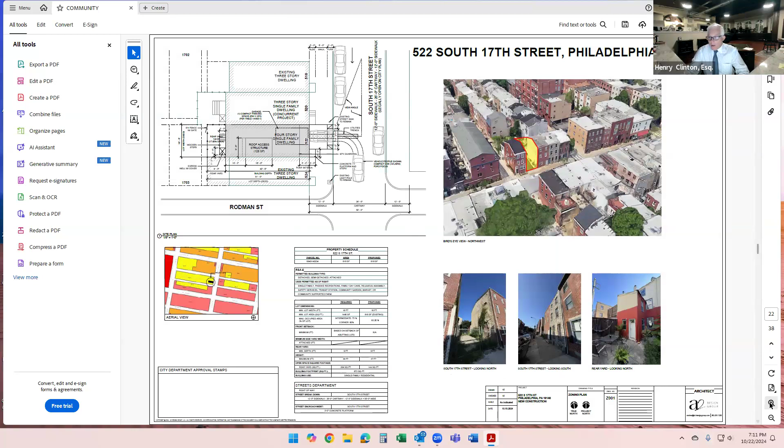As I said before, one of our refusals has to do with occupied area. What I said at the outset is the depth of our building was matched up evenly with 518, who actually has signed a petition of support, which I'll present at the end of the project. We have turning radius that's ample for getting a car in and out, and as you could see from the photographs I showed, there's actually 2 cars parked in the vacant lot now.

I'll walk through the floor plans. There will not be any basement. This will be a slab on grade, 1 car parking, entrance hallway leading to the mechanical space, which will be at the back end of the garage, accessible either from the hallway or from the garage. Then you have a half bathroom and a full bathroom, and then a bedroom in the rear.

You would then proceed up switchback steps to get to the living area on the 2nd floor in the front, kitchen area, back patio area in the yard.

And then you would continue on the straight leg steps up to the 3rd floor, where we have 1 bedroom. The 2 bedrooms are on the 4th floor, 1 bedroom on the 3rd floor, with a large walk-in closet and bathroom. I would consider this the primary bedroom.

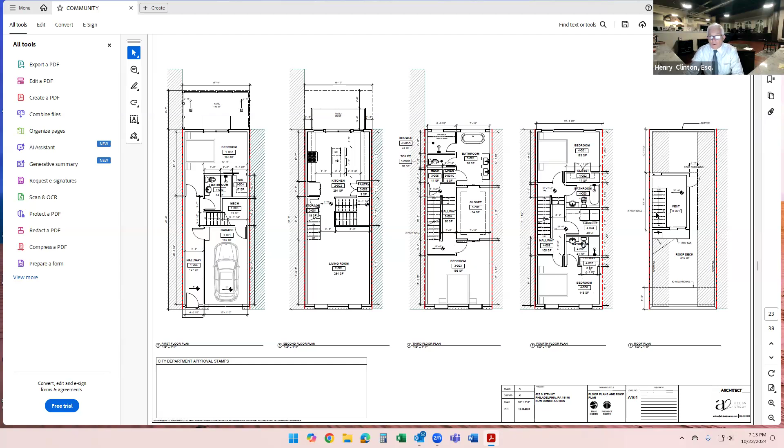Then you would again continue up the stairs to get to the 4th floor, where you would have 2 bedrooms, 2 baths, and then an area to walk up to the rooftop deck, which is accessible from the hallway. We don't have to go through any bedrooms.

These are the front elevations. We have a wood garage with some lights to bring light into the garage, mimicking the front door. 2nd floor, 3rd floor, and 4th floor have casement windows, which will open all the way. The rooftop deck is set back the required space of 5 feet. There is a pilot house to access the rooftop deck.

When we designed the project, it was difficult to line up evenly with the properties on either side, because they're both at different elevations and because we have a garage. But we are keeping the red brick look with some solid lintels across the top and the bottom on all floors.

And then the rear of the property, I have siding, metal siding on the rear, sliding glass door to access that patio, a small walkout porch or deck on the second floor, and then double hung windows on the fourth floor and casement windows on the third floor.

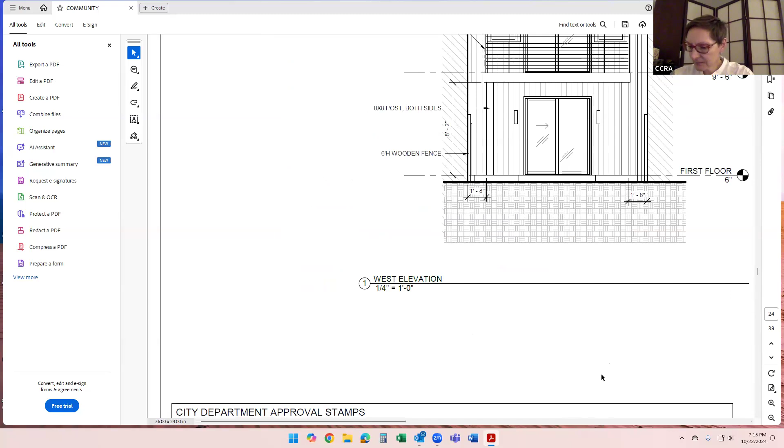I think you're still muted.

Does your owner own 520 South 17th? Yes, he owns both properties. Okay, because the rendering shows he owns the property you're aligning to. Are you renovating that building? That building, I believe, is going to be torn down, and the elevations matched to 522. So the building you're aligning to, you're going to tear it down. Correct. So the alignment's going to a building that's going to not exist.

Okay, that's clear. Sorry, can I jump in here a little bit? My name is Andres, I'm the design professional.

So just trying to explain, the building we talk about is the one in yellow, correct? Correct, so that's the project, but the one that's going to be torn down is the one on the right-hand side. Okay, and which building are you aligning to? So we're talking about a different project here, it's going to be the one we're talking about right now, the one in yellow, right? So there's going to be a new building also built on the right-hand side of that. Correct, I had the cursor on the wrong side. Correct, my mistake, sorry Sam.

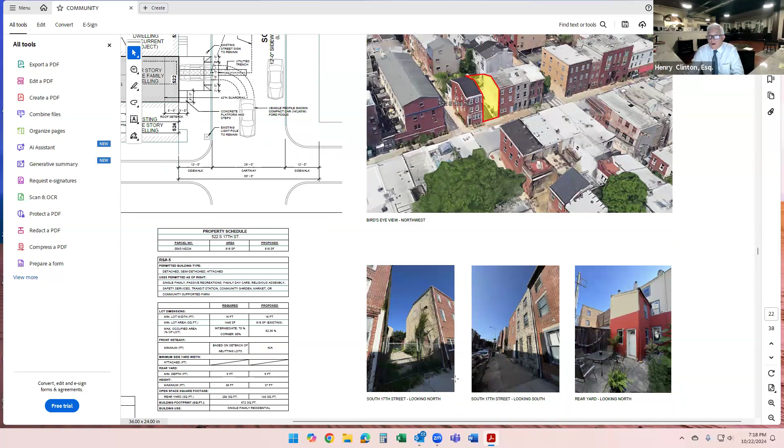But I have two issues. One, I've walked the street, I live in the neighborhood, and I see no garages on either side of the street in our district. So if I'm going to vote personally for a variance, I want to see something in the neighborhood that looks like what you're proposing. I see nothing. Nowhere is there a garage on the adjacent blocks in CCRA's district. Do you have a reason why we should allow a garage on this one property? Well Sam, as I indicated in the photographs, this has been used for parking for decades. There's a curb cut there, and it's just continued use of the curb cut that's in existence.

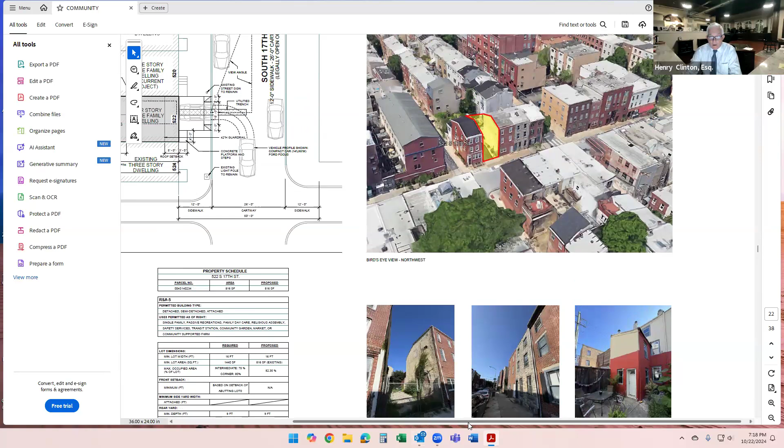Okay, but there's no garage parking on the street, you agree? I didn't see any, no, but there is parking on this particular lot. Right, I agree, on the vacant lot there's no garages. Okay, second thing, you're asking for a larger built area than allowed under the zoning code. Tell me again why we should allow that? Because we were matching up with the depth of the house next door. That's being torn down, going to be torn down, correct? Okay, I'm done. Great, thank you.

Just going down the list, Karen Moskowitz. No questions. All right, thank you. Ben Weinraub.

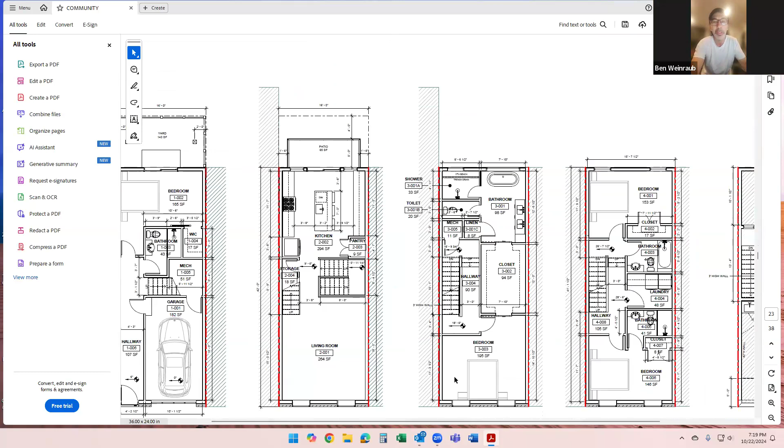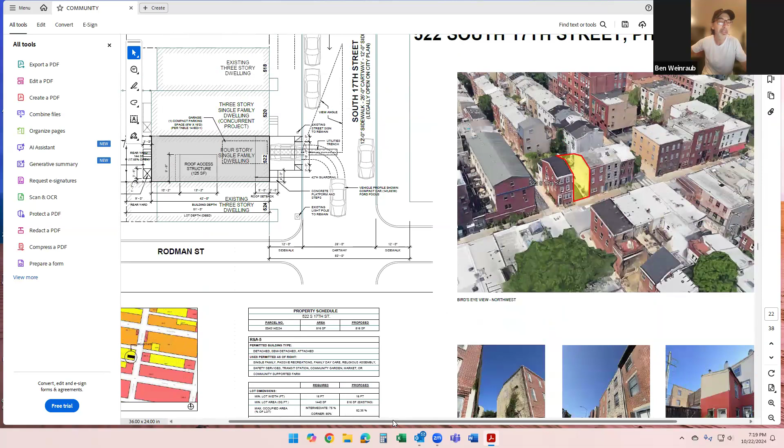Just one quick question, good presentation. The zoning plan shows wooden steps in the back, the other plans don't, I assume that's been deleted. Can you ask that again? Yes, the zoning plans show wooden steps in the rear of the property, and the other plans don't, I assume that was deleted. So it's technically supposed to be just like a wooden platform, right? Because there's going to be like a 6 or 7 inch drop from that sliding door at the back. Correct, so no steps going up to the second floor is my point. Right, correct. Thank you.

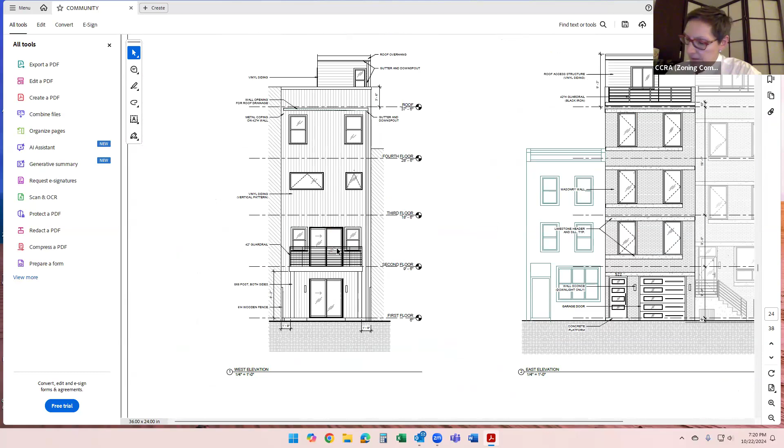Okay, great, Bob Lane. Actually, a lot of my questions were addressed, but what's been your communications with the neighbors? Have you had opposition? Robin maybe can answer that.

I've only attached some signatures from the block. Robin, what you've attached are the people in favor, right? Correct. Yeah, so who have you heard that from? That is not people in favor, Bob, that we could get a hold of. No, but I'm asking, have you heard from anybody who's not in favor? Robin, can you address that? No, we didn't run into anybody that was not in favor. And then we've also sent out the neighborhood acknowledgement forms, for the direct neighbors. So the one for 518 South 22nd, I believe, also has initialed and signed off. So from both, we haven't had any opposition as of yet. Okay, thank you.

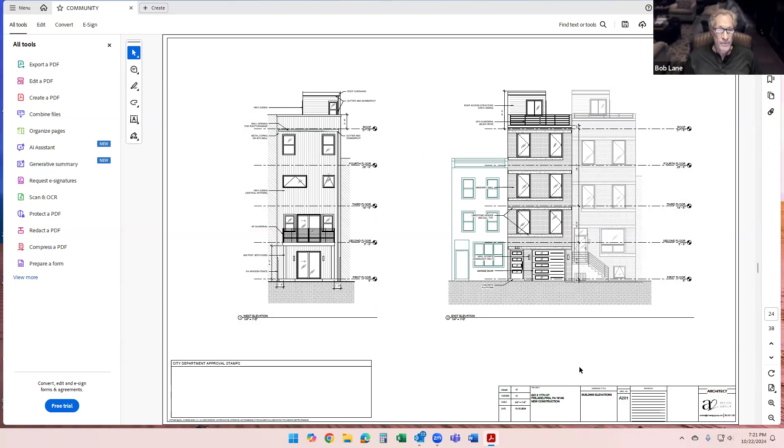Evan Litvin, any questions? No questions, thank you. Doug Mellor?

Yeah, I do have a question. If I had those two properties, I'd be tempted to join them. Is that something you thought of?

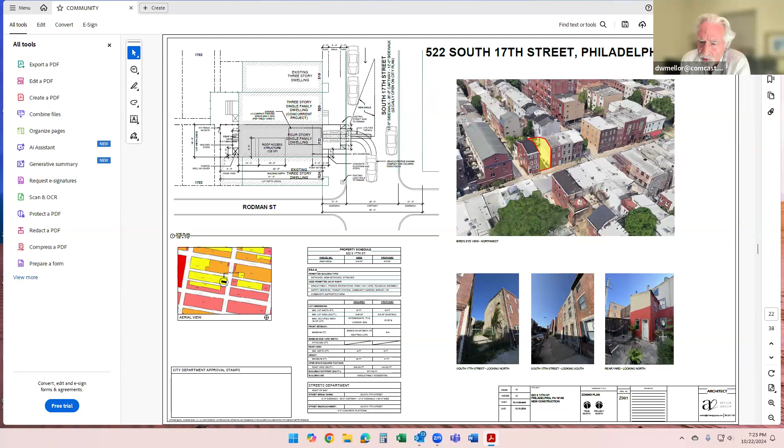And what are these solid lintels that I saw on the plan? So typically we'll try to do some limestone lintels to fit in with the fabric of the neighborhood. We plan to do red bricks, limestone lintels across, just to add some detail and texture. 520 and 522 will have matching facades.

So we did try to line up the heights, again with the neighboring home that will be built by right at 520. When I say we're going to line up the cornice lines and the depth, we're just going to match it to 520, which is a by right project, single family, no parking, that will replace the current home that is beyond repair. Thank you. No problem, okay, thank you.

Ben Zuckerman, any questions? Yeah, I just want to see if I get this straight. The reason why you're asking for more than the required allowable lot coverage is to line up, as I understand it, the front of this with 520 and the rear of it with 520.

Am I correct? Yes. But 520 will not be existing after you demolish it, correct? We are going to line it up with the new construction home that is going in its place, fully by right. It sits on a slightly larger lot, so we're allowed to pull it back a little further.

If you look at Atlas, 520 is on a 60-foot lot, so by right we can pull the project a little further back. So we'd like them to conform on the front and the rear. I think it would make more sense.

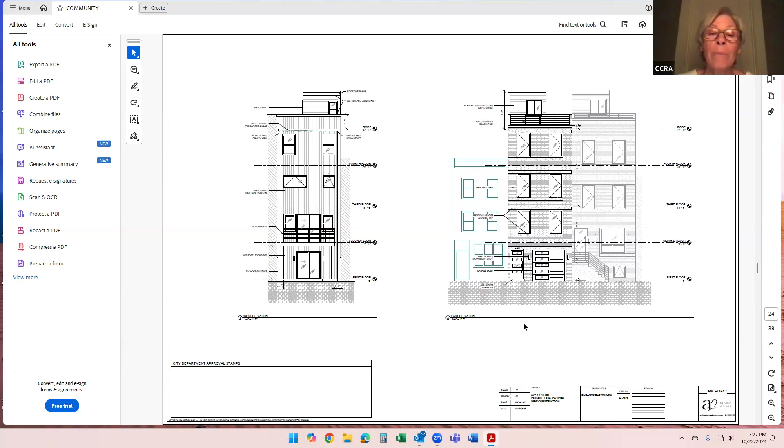I think given that you are asking for an environmental hit by creating more impermeable space by extending the building, that's a second bigger hit by making it impossible to plant a street tree. So our neighborhood is undertreed. A goal for the city is 30% tree canopy, and our neighborhood is less than 12 and dropping, in large part because we lose our mature trees and because of developers who aren't sensitive to the need of trees for the neighborhood. So anyway, that's my objection to the garage.

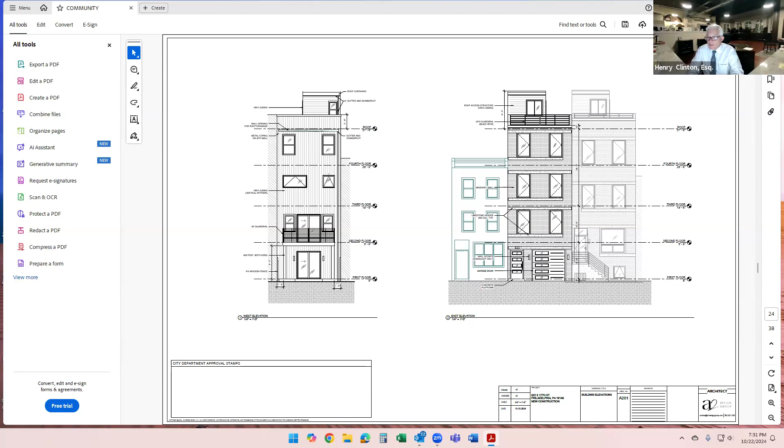I just want to say thank you so much. I think everyone has made their points and I appreciate them. I want to hear from other community members as well. A back and forth might not be the best option. We have heard clearly that there's a concern about trees, and that there can't be trees within 10 feet of the garage. We've also heard questions about the rise and run on the stairs to the pilot house and the lighting—will there be downward lighting, and will there be negative impacts of the lighting on the pilot house? I now want to open it up to other community members.

Are there any near neighbors who have comments on this property, 522 South 17th Street? I invite you to raise your hand using the raise hand feature at the bottom of your screen. All right, going once, going twice. Are there any community members who would like to simply unmute themselves and voice their opinion on the project? Okay, seeing none.

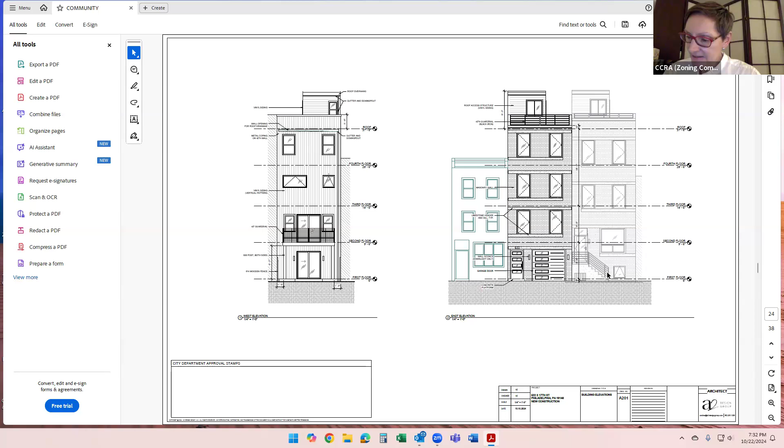Well, I see none, so I'm going to thank everyone for their clear presentations on this project, and thank you very much, Mr. Clinton, for your clear presentation and for everyone else related to the project. We're now going to go to the second project on our list, the second property we're going to hear tonight, which is 415 South Van Pelt Street.

This is an application to legalize the extension of a masonry fence to a height of 10 feet, 7 inches. The reason for refusal is that any fence located nearer to the front lot line than the required building setback, or the actual distance of the building from the lot line, whichever is greater, shall be no more than 4 feet in height and no more than 50% opaque, whereas the proposed fence is 10 feet 7 inches high, and more than 50% opaque.

And so now I'm going to invite the representative for this property to present. I think Jennifer Bazydlo is on the call. Yes, and very good job with my last name—it's Bazydlo, but that was very close. So I appreciate that. May I share my screen?

Please do. Okay, let me just get to the right... give me 1 second, I have to hold on. I had something else open and it doesn't want to bring up my presentation, 1 second, I'm so sorry. In the meantime, what I'll do is outline our agenda—we anticipate 10 minutes for the presentation, and then our goal is 15 minutes for all questions. Sure, let me just close out of this and I should be ready to go. I apologize for that, there it is. Sorry, I had another PDF open and it wasn't letting me get to this PDF.

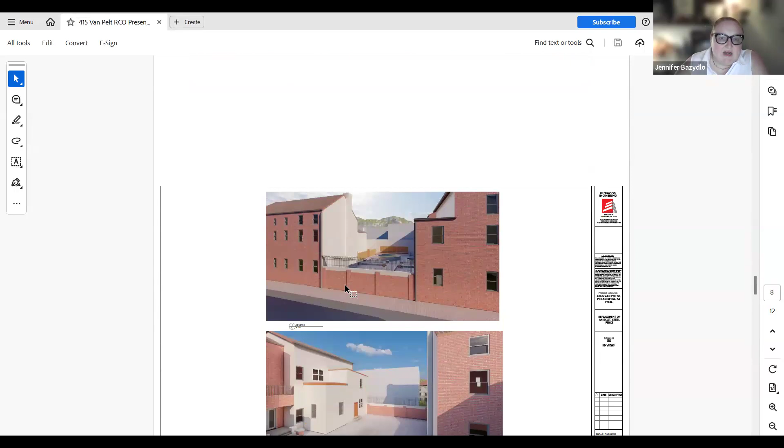Through that, the thing that came up the most was to make it look more like what it had been—brick with metal over it, but perhaps with some added security. In this one, there are big gaps between the bars and the brick wall where people were using it to leverage themselves up. And the tines at the top of the fence were going in either direction, not just one—one went into the property, one went out—which was also allowing it to be jumped a little more easily. And this fence was also only, let me get to my data here...

I believe that this one was, I'm sorry, in like the 9-foot range.

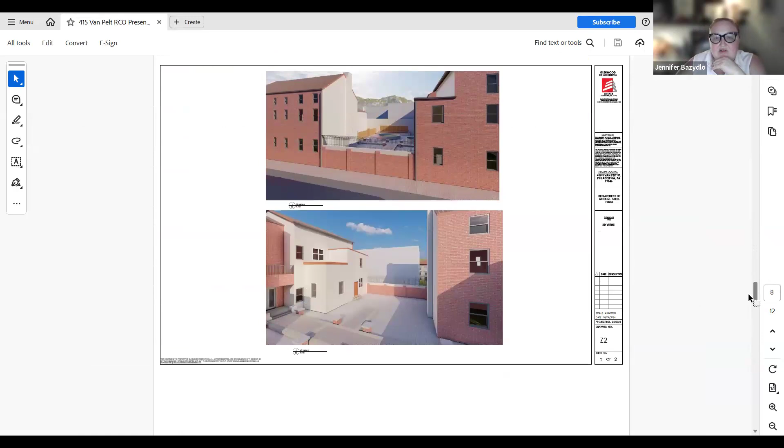So our proposal, after reviewing with the neighbors and with the property owners to try to find a compromise, is this revised plan right here. There would be 2 layers of brick with stucco covering them on the parts where the original brick would be kept, and then 1 layer of concrete block with stucco covering on the parts that are the pillars.

And 2 layers in the divots, where it goes lower - that's an additional 1 foot 4 inches of stuccoed block. It's 10 inches on the top where the pillars are, and above that would be a 4-foot metal railing, all facing out, for a total height now of 12 feet.

The original black metal were 3 feet 10 inches. These are 4 feet, and then they have the additional height on the brick or concrete block. What this provides is the additional security of having a pretty solid wall above the height where someone might be able to reach under and prop themselves up. But then we have openness and more of that original feel with the metal above it, and additional security of pointing the tines out.

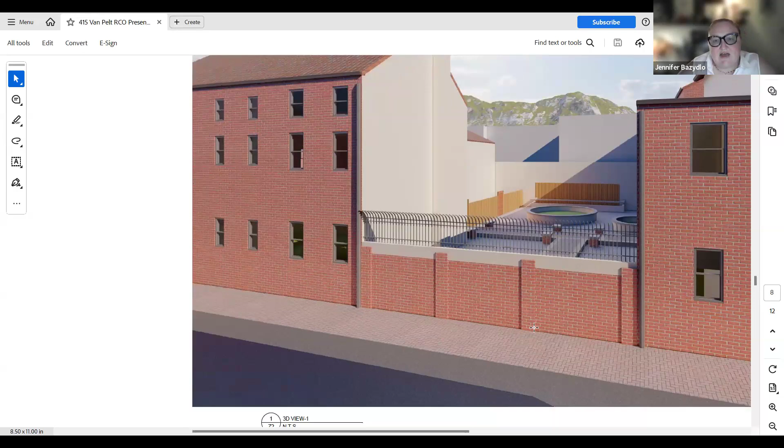So it's harder to jump the fence. I think what people really objected to is feeling encased by this wall without being able to see anything above. So the compromise here is that you'll have just a little bit of that stucco, and then railings above, which I think meets the needs of the community and the residents of the building. So that's where we came up with this.

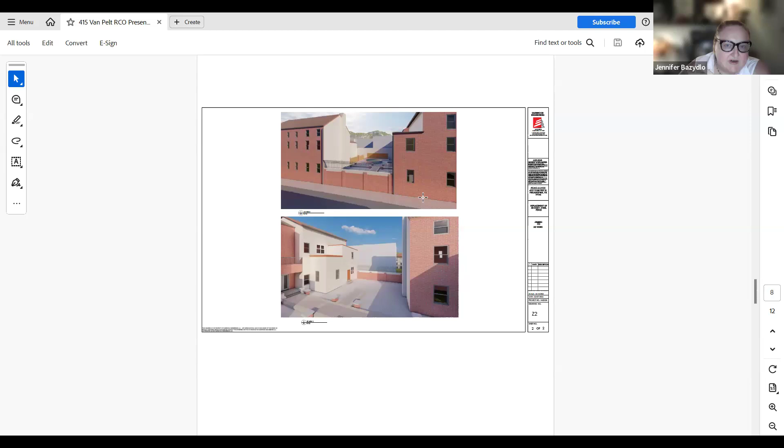I just wanted to point out that because of the location, had these 2 buildings just been connected, there could be a 38-foot brick wall here. The only reason for the refusal of the height and opaqueness is because these 2 buildings aren't connected. It's a weird setup because you have all these different buildings on one parcel, creating unique zoning and architectural needs to fill in at street level where a building normally would be, with something that protects the inner courtyard of this complex.

So, in the interest of brevity, I think it's pretty straightforward, not super complex. I know people will have questions, but I don't think me talking more without hearing the questions is going to help. All right, well, thank you for that. So now I'll open it up to committee questions.

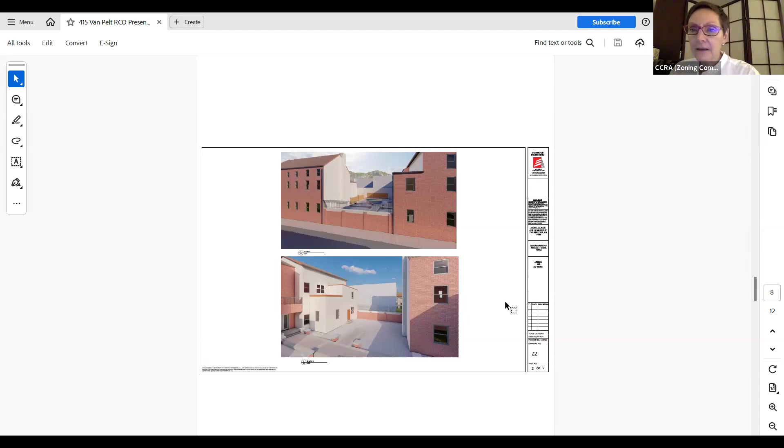I'll start again - Sam Gordon, any questions? And Sam, you're muted again. There we go. Is there a reason that you need that stucco portion?

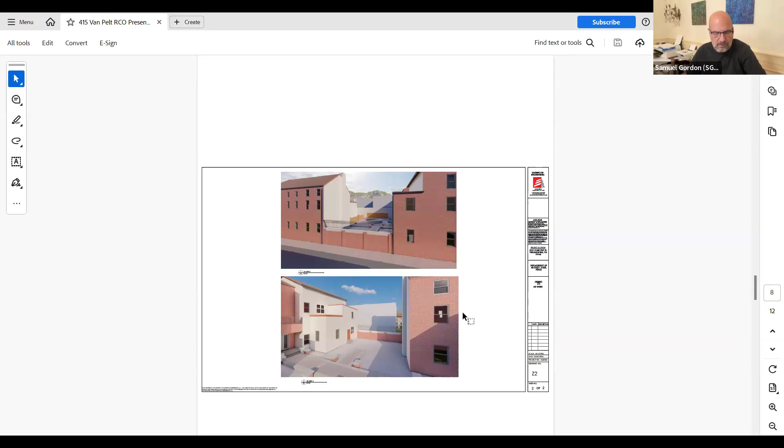Sure, so it will be matched to the sides of the building. The reason it's necessary to have something solid there is because people were using it - we have it on video - to reach over that existing brick wall and use the space between the metal and the brick to propel themselves over. So we needed the solid part to be a little higher to prevent people from leveraging themselves up over the fence. The whole reason this original fence was changed was because people were regularly hopping over and breaking into apartments, stealing things.

Right, but you're only proposing a 10-inch CMU, which is- sorry to interrupt, can I just chime in, Sam? Yeah, Sam.

This was recommended by the contractor who's going to build the fence. He said he needs a base to anchor the bolts into, and that the brick itself isn't the strongest - he wanted us to do a poured concrete. So I said, what if we just cut the wall and leave the CMU that's filled with concrete - could that serve as the base? And he said that'd be fine. So it does have structural integrity for the metal fence. I'll leave it to other members of the committee.

Sam, we could also discuss covering that particular portion, maybe some sort of cladding, if that's really the issue, but it does need to be a solid portion at the bottom of that metal grating. I'm open to painting it black, red, or the same color as the stucco if that'll look more appealing, but we need some sort of base for them to anchor the fence into.

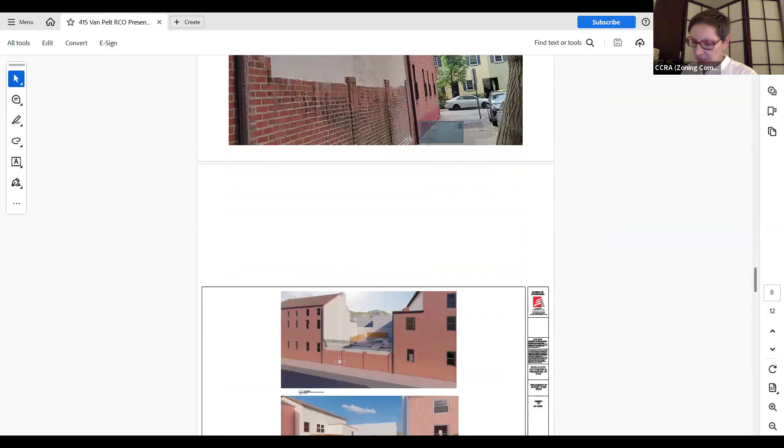Those are helpful clarifications. Karen Moskovitz, any questions? What has the reaction of the neighbors been with this?

I had been in communication with Charles Goodwin, who I believe is on the call, so I won't speak for him. I know he had expressed that he wanted the metal grates. I had sent him these plans but hadn't heard back from him yet.

Charles, I'll leave it up to you to talk about the neighbors' reaction, since I know you were talking to the other neighbors as well. We will get to the neighbors, including Charles Goodwin and everyone else. Karen Moskovitz, any other questions?

No, that's all. Ben Weinrob? No question. Bob Lane? Yeah, I have a couple.

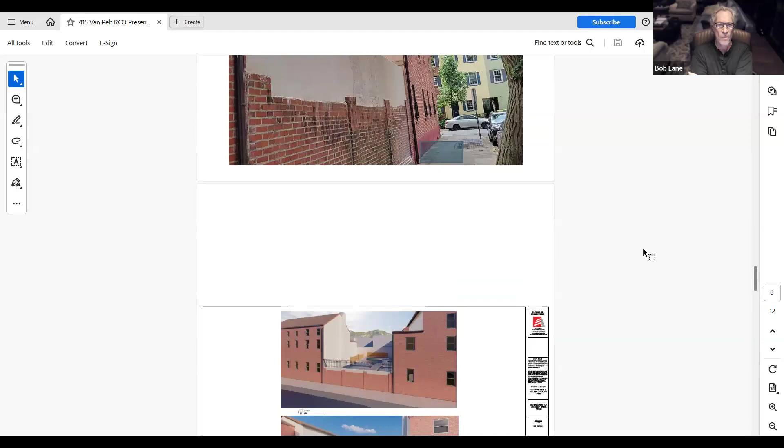I totally understand the desire, I have it too, for security living in the city. What is unique about this property? Are you more dangerous or more vulnerable because you have a fence there than all the other properties in Center City that have walls and fences that comply with zoning? What's unique about this property?

I think the unique thing about this property is, if we can go to the overhead look here, hold on, let me zoom in a little bit. This is all one property, consisting of 6 different buildings. There would normally be, if this was the typical street, a building here that would be 38 feet tall.

Sure, I would say the difference here is that it's more attractive to crime because it's not a single person's property, it's 45 people's property. I would also say there was an existing wall, a grandfathered-in wall that was 10 feet tall, and people were still hopping it. So clearly there's an issue with this particular location, because we already had a wall and fencing much higher than allowed by right, and we were still having people hopping it.

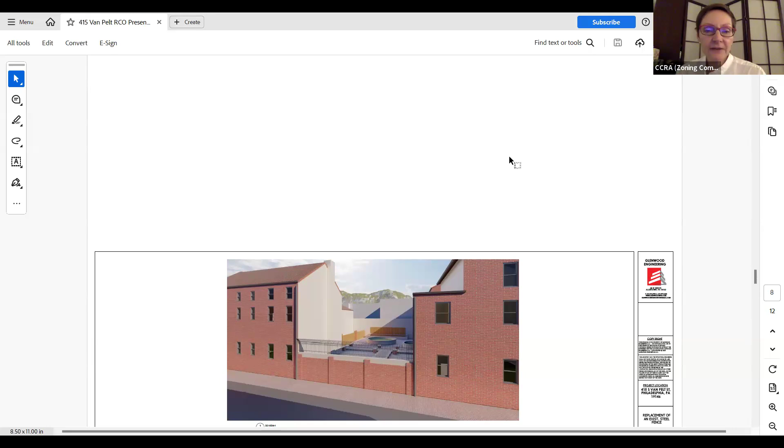Well, if there's a spokesperson for the neighbors, we'd like them to go first. Yeah, I hate to self-appoint myself, and all I've been doing is running emails. I would say the only reaction I've had from any neighbor to the proposal, I mean everyone, to sort of put some more perspective on this.

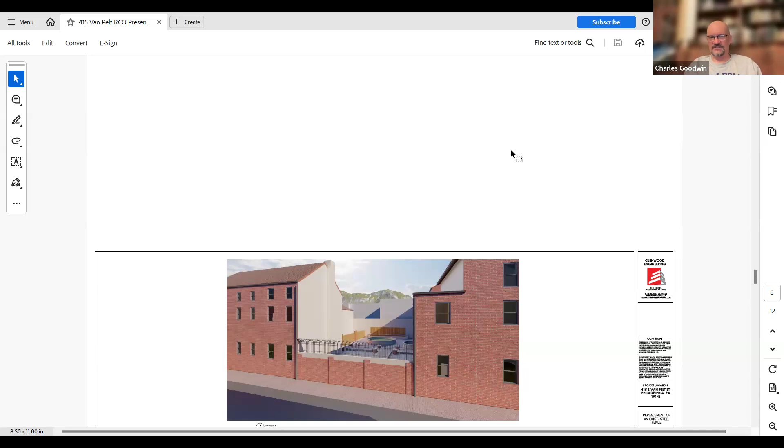This is actually a nice, lovely little courtyard with, unfortunately, the rendering doesn't have the trees in it, which when the metal fence was there, you could walk down the sidewalk and look into the courtyard and you'd see all these lovely large trees, as you could see in the satellite photograph, which is really quite contributing to the block. I think everyone was content with the prior arrangement, which was a masonry or a brick fence overtopped with a metal fence.

And again, no one has had any complaints save one thing about the proposed replacement. Everyone seems to be favorable to it, except for that little gray stripe in the middle where the metal fence is being anchored, and some people, one or two people, have expressed dissatisfaction with the appearance of that.

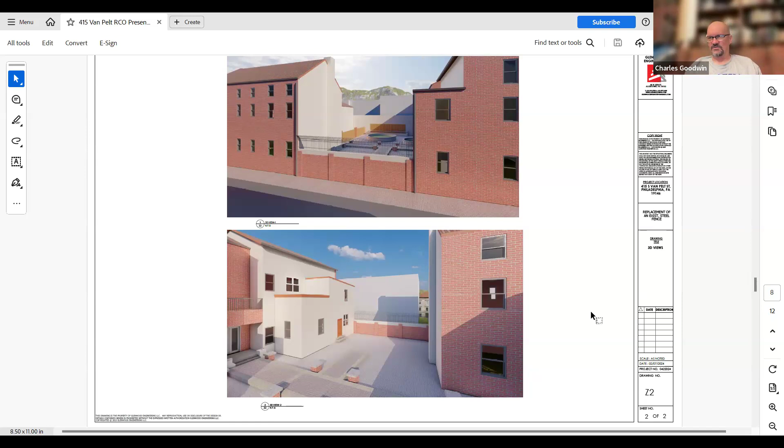I don't know if it would be feasible to perhaps put something like tiles or a decorative element over the top of, or on the facade of that concrete to make it more attractive. I suppose you could try some masonry veneer, but I think that would probably clash horribly with the existing brick. Speaking solely for myself and my own design sense, otherwise, no one has really, we were fine with the way it was before. So this is not materially different from the way it was before, except making it a tad more secure.

All right, well, thank you for that. I would just like to say that the original proposal was not to leave it gray, or what we're thinking isn't in the rendering gray, but the initial thought was to match it to the stucco, like this kind of red stucco that mimics the brick, so it wouldn't stand out quite as much. Well, but I was thinking like some terracotta tiles or something that you stick on the front there. All right, understood, you would like some sort of element other than just the stucco. Right, or some various Turkish tiles, something that's functional but decorated. Understood. Okay, well, thank you all for that.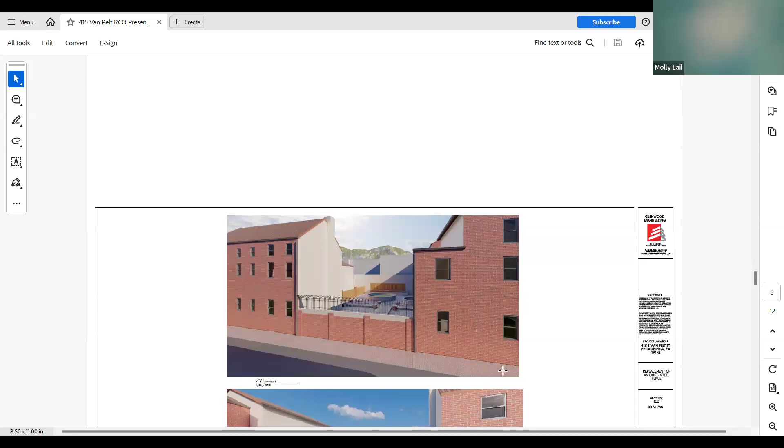Thanks, I live on Van Pelt Street, Molly Lail, and I think I speak for most of the neighbors. We were kind of horrified with the install because it was so bad. There's a middle section that looks unrelated to the sides. I'm just wondering, I've got to wonder how the fence was affixed before without the concrete and stucco.

Thank you for that question. In terms of this updated proposal, can you share your questions or your views on it?

I agree with Charles. It seems okay if you're going to make the concrete block a little less obvious.

I'd also want to say one more thing. A lot of the problems with the thefts was the front door not locking. There was an anteroom that was constant, anyone could go in there, I could go in there at any time. And I think a lot of the thefts were due to that, not necessarily if you have a video of someone going over the wall.

But I must say the front door did not work for a long time. The front door has been addressed and there was still a lot of thefts going on afterwards. That's when the idea about the fence came up.

Are there any other community members who would like to ask a question or state a position on this project? I invite you to unmute yourself and share your point of view. I have one more, go ahead.

So the owner seems amenable to suggestions, and in similar situations, I'm an architect, I think a limestone cap would be both attractive. It could be real limestone or cast limestone. It would put a waterproof cap on top of your wall, which would be functional, decorative, and allow the person to anchor the railing to. Would you be amenable to that rather than that stucco wall?

Yeah, if you want to send some options, I want to do something relatively cost effective and not spend crazy money. We're going to be investing a lot in rebuilding this the proper way and appeasing the neighbors. If you could just send me exactly what you're talking about, I can look into it. I want the neighborhood to look great. Your mason, if you want a limestone cap, he should know, and if not you can reach out.

And Sam, for those of us who aren't architects, what will a limestone cap look like? Actually, it'll look like the back of my house where I put a deck. Well, that's great. And for the rest of us?

It's a traditional treatment for the top of a brick wall. Brick is very porous, and if it's left open, water can get in and freeze, and deteriorate the wall. So a limestone cap, I'll try. What color is it? A beige. It's a beige cap, and it's a traditional cap for a wall.

Do you have an image, Ethan, or I'll look for one while other people are talking. I found an online image of it, and you see these all over town. It's basically like a little flat stone cap that goes at the top of a wall.

Let me call on Ben Weinrob, a fellow committee member, and then back to Charles Goodwin if he still wishes to speak. Not an architect nor a security consultant, but I'd reference, slightly different scale and size project, the courtyard at 1706 Rittenhouse. Your problem is lack of visibility. Everyone's going to try to get over a wall because they know once they make it, there's no visibility to the street. Any idea about keeping the brick pillars and putting metal fencing between all of them so you can really see the trees, and also anyone who attempts to jump over knows they're in plain view. Just something to consider. I don't think 1706 has a security issue with their fence.

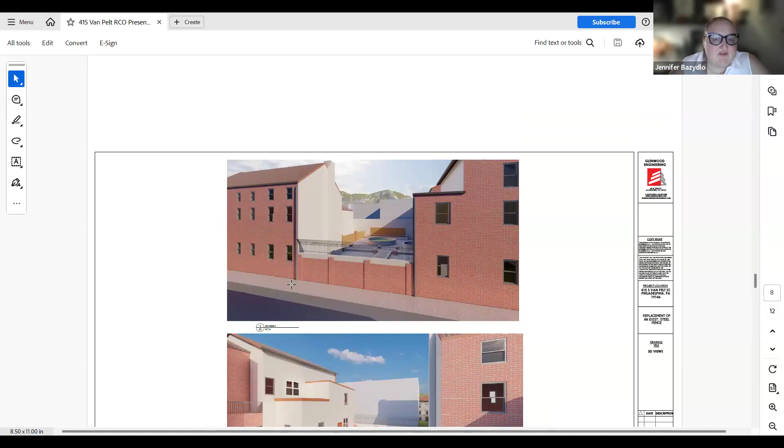I thought I heard you say two different numbers about the height of the proposed fence with the railing, or whatever you call it, on top. What's the total height? Is it 10 feet 7 inches? Twelve feet now. Now it's 12 feet. Yes. Okay, that's different. So it's yes, because we changed the plan.

So the brick wall is staying the same as... hold on, let me actually bring up the rendering because it'll be easier to explain. One sec. Not the rendering, but the plans.

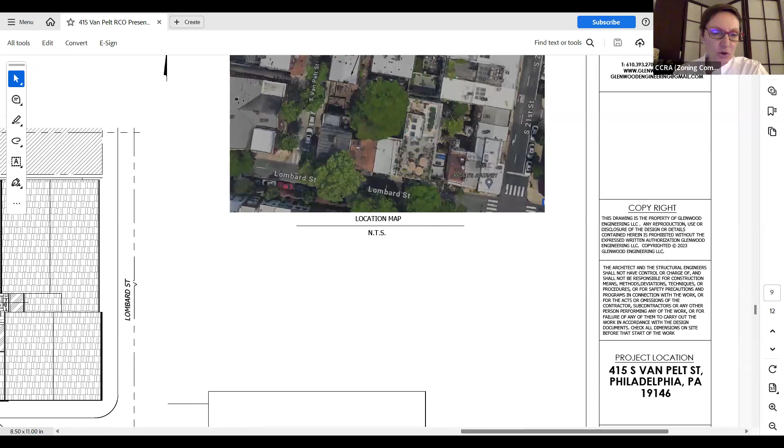And can we just interrupt for a clarification, following up on Ben's question, in terms of what is in the refusal? We understand that the application is to legalize the extension of a masonry fence to a height of 10 feet 7 inches. Is that what you're applying for? We will be asking for an amended refusal if this is something that the community will support. So you need to ask for an amended refusal. Yes. Okay, because it's a different height.

It will be less opaque than the original proposal, but because of that existing brick wall, it'll still generate an opacity refusal too, because that's over 4 feet.

Well, excuse me, but I don't, as a committee member, know how we can vote on something that's not before the zoning board. So we need to see the amended refusal, the amended appeal, and otherwise we're voting on what's on the record right now. Is that not right, Wade? There won't be an amended appeal. There would just be an amended refusal, and the refusal would be based on these plans.

Right, and thank you for that. And so I wonder whether our counsel can weigh in on this, because I had the same question, Bob, whether we can vote on something that is not going before the ZBA. Well, let me ask this question. In addition to an amended refusal, are you planning to also submit a proviso with amended plans? Correct, yes. Okay.

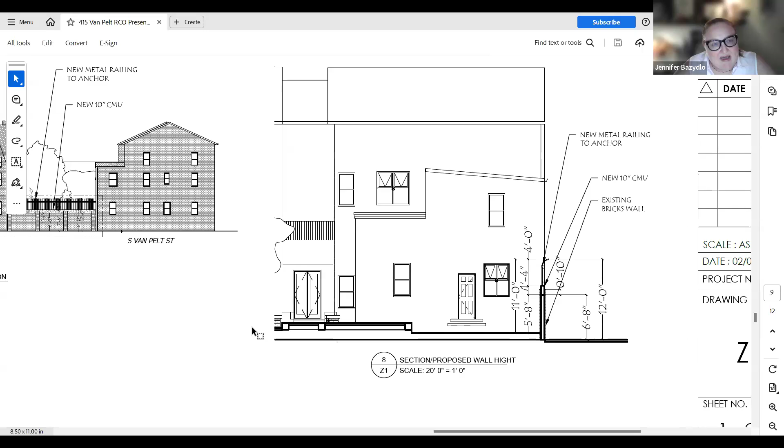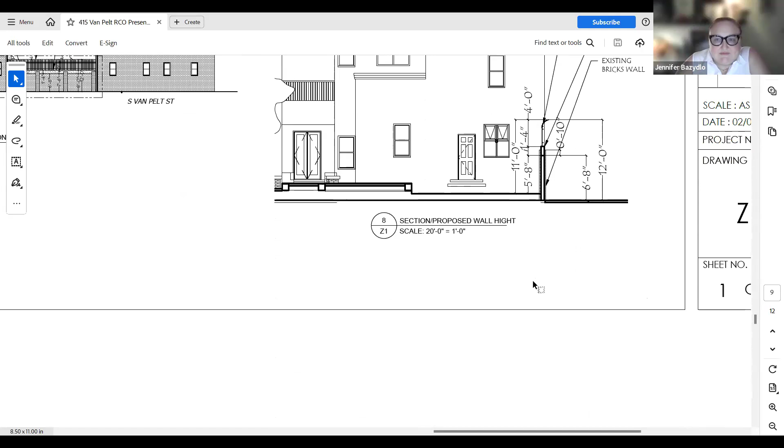And so I understand if you want us to come back again, but I would like some feedback from the committee, formally, about what they would have submitted, because I don't want to go with these plans if this is something we still need more revisions on. Well, we could talk about that during executive session, and Jennifer, I can reach out to you after I have a sense of where the committee stands on this. Is that okay? Yeah, that's fine. Great, okay, that was very productive.